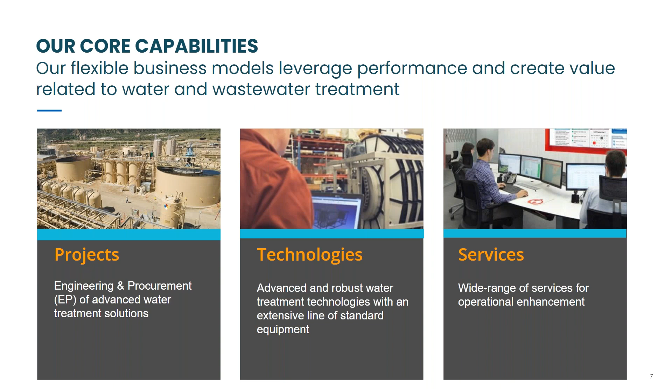Okay, so now I'd like to introduce our speakers for today's presentation. Mark Dyson is Vice President of Veolia Water Technologies, overseeing its global mobile water services fleet. He has more than 25 years experience in the mobile water treatment sector. During his career, Mark has both lived and worked within the UK, Germany, US, and Kenya, where he has managed the development of the water business for a number of major water treatment organizations. Mark holds a Bachelor's of Science in Engineering and Management from Brunel University and an MBA from the Open University.

Additionally, our second panelist today is Tim Clark. Tim is the Vice President of Technical and Execution for Veolia Water Technologies North America. He is a chemical engineer with over 30 years of water treatment experience in chemical treatment, process automation, membrane technologies, and implementation of operational improvements. He has been with Veolia for over 15 years and has a bachelor's in chemical engineering from the University of Tennessee. And now with that, I would like to turn it over to Mark to start our presentation.

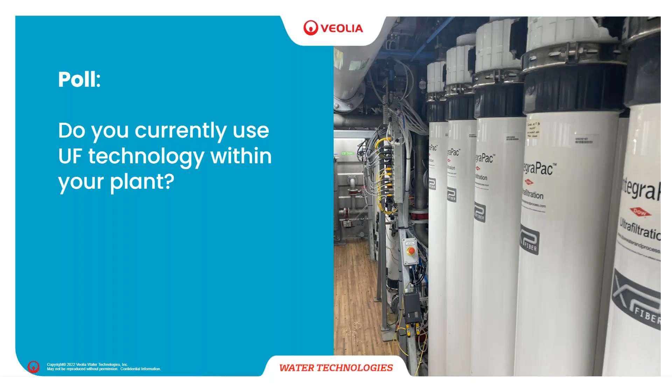So the first thing is, why ultrafiltration for industrial water? If you look at the overall market, UF is a growing technology that's now being used more and more commonly in industry over the last 20 years. If you look at the treatment applications where it's typically used, it's used for the treatment of groundwaters, wells, aquifers, where there can be metals within the water, surface waters, rivers, lakes, dams, streams - typical places where you could get suspended solids, also TOC. And more now, a lot of organizations, due to environmental and sustainability issues, are looking to recycle where possible secondary wastewater. So UF actually gives you the opportunity to be able to do that more now than previously. That's quite an important area we should be looking at.

If you look at the contaminants that are removed or reduced, UF is a physical membrane barrier. So it's very good at reducing turbidity, suspended solids, colloids - especially problematic colloids like silica - organics, TOC, and microbiological activity, to some extent bacteria, pathogens, and viruses. Metals like iron, manganese, and arsenic can also be removed. Overall, UF as a technology can either be used with or without chemicals - it simply depends on the process, and Tim will talk a little bit more about this for you later. But these are the places where you would typically find UF in industry and the types of contaminants you would be looking to remove or reduce for your water treatment plant.

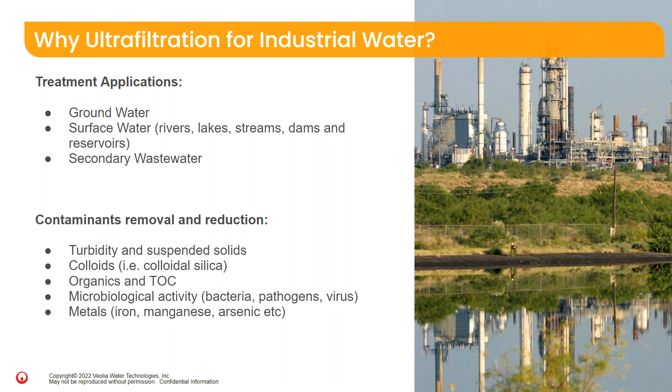So if you look at some of the benefits of UF, it's a continuous, reliable, and steady state operation for the production of treated water. It actually produces a very consistent quality of water during its operation, because it's a physical barrier. So unlike conventional clarification or filtration where you can get hiccups in the operation, UF does give you a very consistent both flow rate and quality of water. It has a very high efficiency - typically most recoveries are in excess of 90%. This does obviously depend on the feed water and the contaminants you're looking to remove, but typically it's very high compared to conventional treatments.

And it has a very small footprint, which is great where you want to do upgrades or retrofits, or at existing sites where you've got some issues and contaminants you want to remove, and space is at a premium - where you sometimes can't build something new within an existing facility.

And the other thing, because it's a membrane system, it's a pumped process, this enables you to ramp up by adjusting the flow rates and pressures of your pumps. So you can actually scale up and scale down the amount of water you want to produce, obviously within the limitations of the membranes.

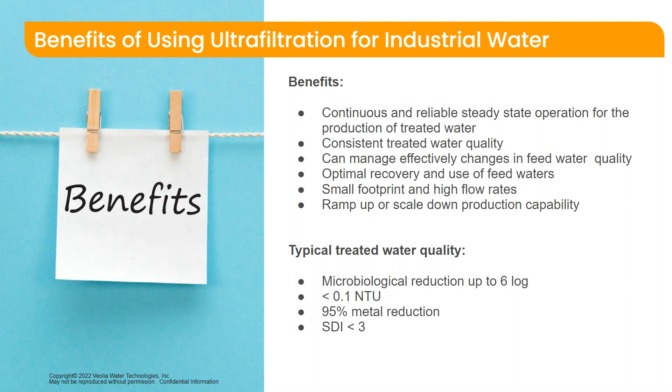So all of these points really would add up and give you a much more reliable operation of your permeate plant. So what I'd like to do now is step you through a 3D walkthrough of one of our trailers. I think what we're trying to do here is just to purely demonstrate to you the compactness and the uniqueness of what this mobile asset looks like, and the equipment scope, and basically how it's configured. So if you just give me a second, I'll pop up the video and we can take a look through.

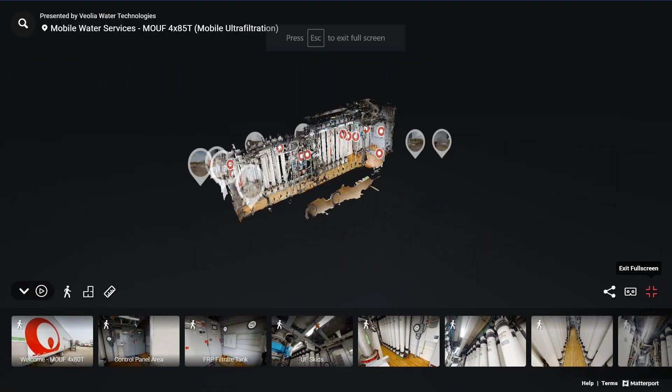So to start the video, as you can see, it's very simple. It's just an external trailer, and then we go through the unit and up through the steps and into the control room here.

So you can see within here is a complete control panel. There's an HMI, so everything for the operation of the plant is retained within this complete control system.

Then over here, this is a unique feature of our system: this is the filtrate tank. So all the water produced by the unit is fed into this tank, and this is a 2,800 gallon tank. From this tank, the water is normally sent with an external pumping system to your application. Typically this tank is supplied as a separate piece of equipment, but with our assets, it's all combined into one, giving you a distinct advantage of having the asset actually within the equipment.

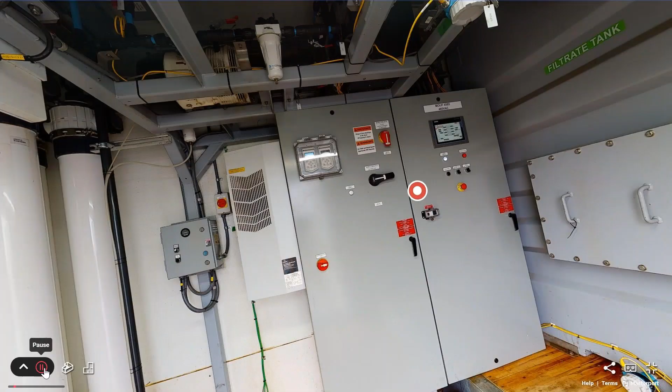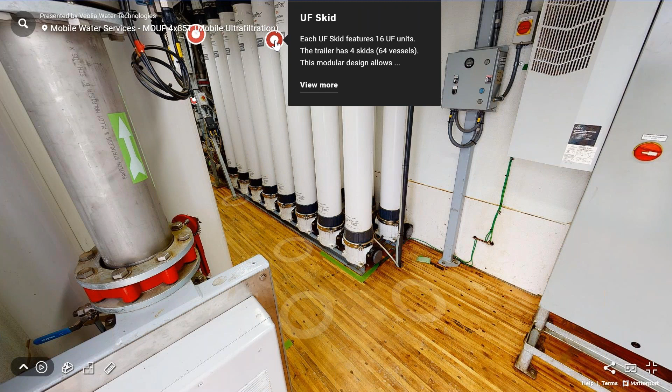Moving round, you can now start to see the infrastructure and the membranes. This gives you one rack of membranes. Within our system, we've actually got 4 racks, so there's 16 UF modules in each of these racks. The way the system operates, you can either run 1 rack at a time, 2, 3, or 4, which gives you quite a lot of versatility in terms of production output.

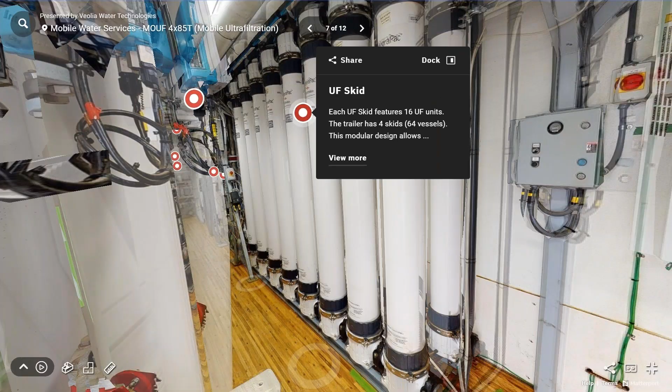If you're running the system below its maximum capacity, it also gives you a lot of versatility in terms of being able to switch equipment on, off, ramp it up, ramp it down according to your cleaning and CIP cycles and backwashes. So then just looking down the trailer, you can see here...

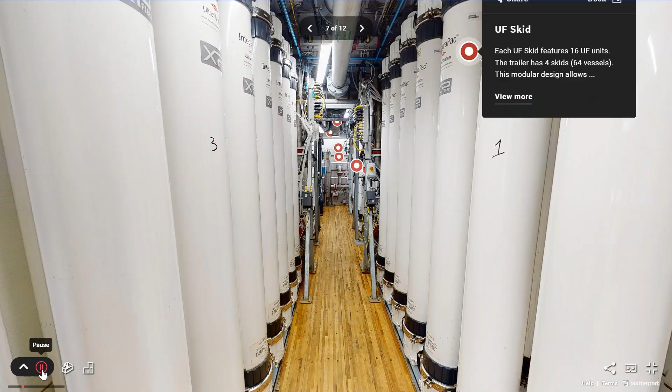It's quite extensive until you come to this middle section of where the UF trailer is inside. You can see everything's quite tightly packed in. Just over here, this is the control and valving system for these 2 racks of membranes on this side, and it's actually replicated on the other side.

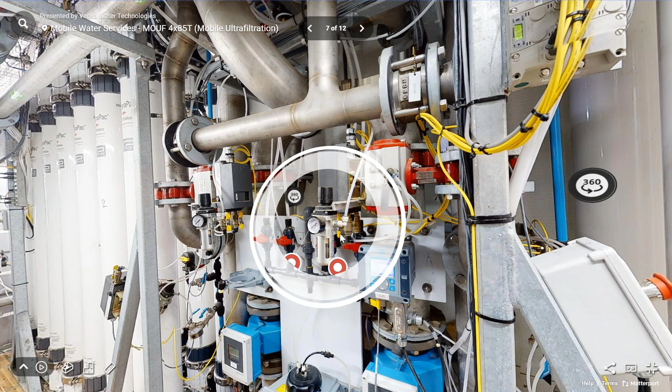So each system comes with its own online turbidity meter, so you've got complete visibility of what the treated water is at all times, so there's no surprises there. And you've got a specific flow valve which controls the flow in and out to each UF system, so everything's balanced, everything's monitored.

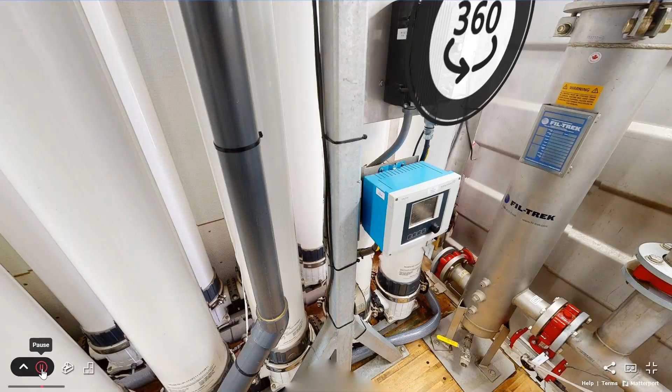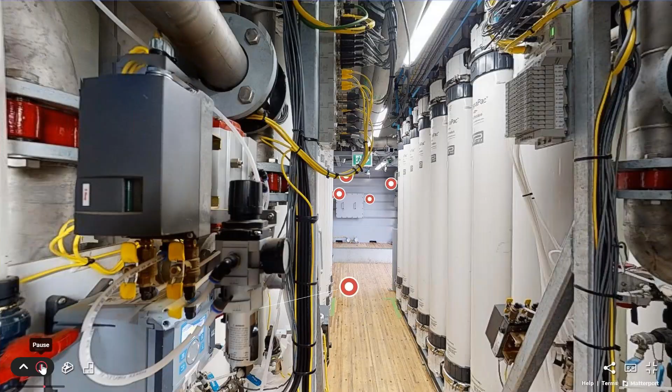So if you do have any problems or issues with the quality of the system, you can shut down different trains at different times, and you're not fully dependent on only one complete unit. And that's what it looks like at the back. So I'll go forward further, going back to the door again, and this is where we go a little bit outside.

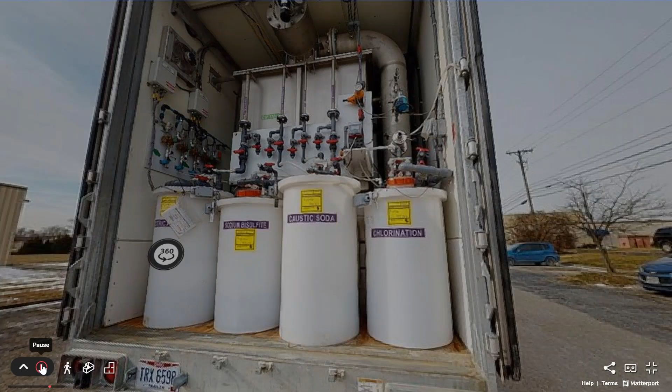So it's a little bit slow, but we get there. And this is important. This is the rear of the trailer. So at the back of the vessel here, this is your CIP tank. So if you have to do any in situ chemical cleaning of the membranes due to fouling, all of the control systems, all of the chemical systems are mounted here. And as you can see, you've got your various acid, alkaline, oxidants that you can put into these tanks, come up with the right sort of cocktail and formulation to clean in the event of any fouling of the membranes.

And you can shut down, as I mentioned, individual trains one by one to make sure that you can clean independently. And at the front of the unit here, you've got all of your electrical power and connections. So again, it's very easy from an external point of view to connect up to this equipment, get it operational. So it's very much plug and play, put the power to it, connect the feed water and the drain, put your chemicals in as necessary, but everything else is within the trailer itself.

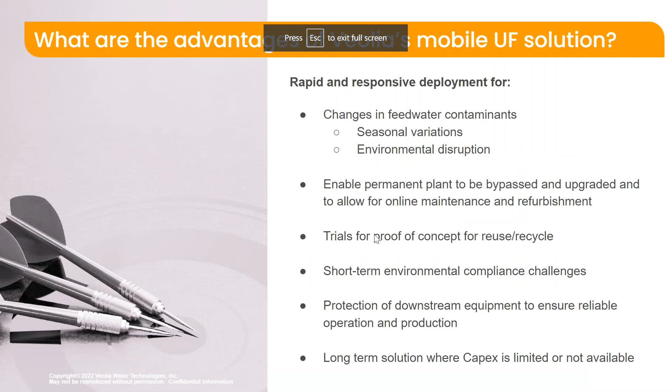So we thought it'd be useful there just to show you what the trailer looks like from inside and basically how the equipment is configured. So I'll go back to the presentation now. Skip that. Okay. So hopefully that was interesting. If you ever want to see a piece of equipment as well, we can deploy one so you can see it.

So what are the advantages of our system really, of the UFs? So the key advantages are that many of you might have experienced seasonal variations in feed water contaminants, especially if you're taking in water from rivers or any sort of surface waters. Contaminants can change due to heavy rain or dry seasons. So the good thing about the UF, it can be deployed very rapidly, and as you see, it's all contained within the same unit, so it's very quick to start up and put into operation.

So if you do have any of these environmental or weather-related disruption issues, we can mobilize a system very quickly to your site for short periods or longer periods of time, just to bridge that time period that you need to have your plant operational, where otherwise you could be facing some sort of shutdown or damage or effect on your plant. It can be used, and it has been used, and I'll show you a case study later. You can install the system if you have to do any maintenance on your clarification system or on your filtration system. So you could actually bypass these assets and carry out hot maintenance, so there is no downtime to your plant.

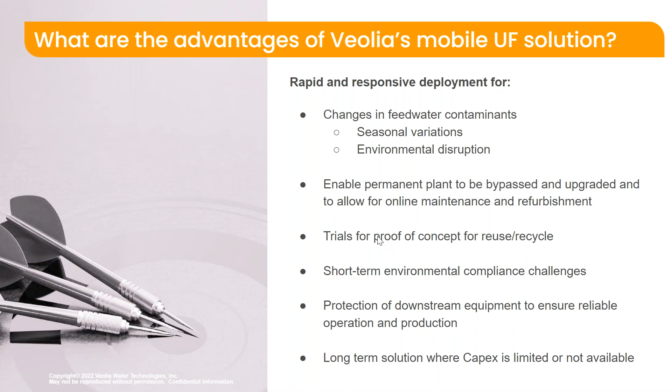Short-term environmental compliance challenges: from a production perspective, you may be producing different products at different times of the year that may have different contaminants in them, which may stretch or affect your discharge consent. So again, you could apply a UF here on a temporary basis to treat the wastewater to make sure you're fully compliant. And it can be used both for short term and for long term. So where CapEx is potentially an issue and you might be delaying an investment for 1 or 2 years, you could actually rent this for that time period, or potentially a longer time period. Why buy when potentially you could rent is a slogan there.

So some of the unique features of our UF, as I mentioned before, it's very compact with very high flow rates. The 4 skids are actually capable of making up to 350 GPM each, subject to the feed water. So they can either be operated 1, 2, 3, or 4. So you can actually take 350, 700, 1050, or up to 1400 GPM from the unit itself. So it's very, very flexible.

And when you do the CIP and backwash, because it's a very modular system, you only need to take off 1 rack at a time. So you don't experience, say, all or nothing or 50%. You'd only expect something like a 25% downturn in flow, while 1 unit CIPs or backwashes, then it's back online. So you are getting continuous production from the unit.

And it's a very simple, as I've mentioned, standalone plug and play solution. So everything pretty much comes on the trailer, which optimizes things like logistics and freight costs. So when you look at the process train, it's got the latest, highest efficiency membrane technology, we believe, on the market. Comes complete with pre-screening.

All UFs have to have pre-screens, taking out the lumps and the bumps from the feed water. The backwash tank and pump that we saw inside, and the membrane CIP system. And it's got a complete air scour system, because you don't always want to use chemicals to clean the membranes; if you can just do it with an air scour, that's more environmentally friendly.

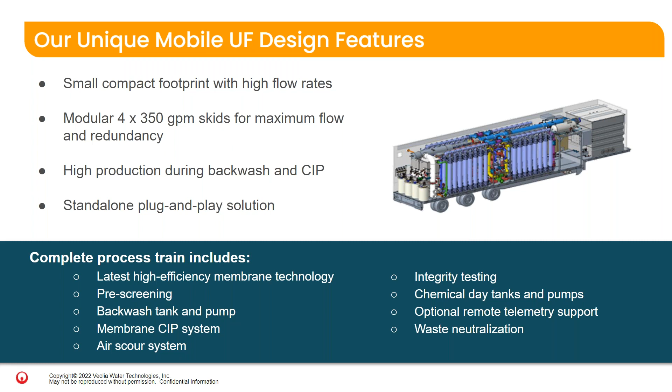The membranes have automatic integrity testing, so you want to test for leaks as well as measuring the turbidity on the outlet, complete with chemical day tanks, and you could have an option of remote telemetry support, which would give you the typical main parameters you'd be interested in, like flow, etc., and common alarms, which is very important, and the waste neutralization to make sure that any of the chemicals you're using on board the system are fully neutralized before you discharge to your wastewater.

So our approach is quite unique. We work with our customers how they want us to work with them. So we can offer very minimal operational activity with our clients, should they wish, or they can be involved more or less. It depends how they want to manage the deployment of this. We have 24/7 support to make sure all our assets are functioning correctly, giving you the right quality and quantity of treated water.

Our preference is always to use minimal or no chemicals with the operation of the system, but sometimes you have to use some. We adhere to all of the health and safety requirements, which obviously are critical with these pressurized systems and systems that are using chemicals from time to time. And we're there for as long as you need us. It's very much a pay-as-you-go service.

It's very open-ended. So if we come on site, if you have a need for a week or two and you want us to stay longer, then we're able to extend that and work with you. So you can always be sure that you've got someone who's providing you with treated water. And it's a complete service: logistics, spare parts, support, reactive and proactive maintenance, engineer support. As you can imagine, we're there each day to help you through the operation of this equipment.

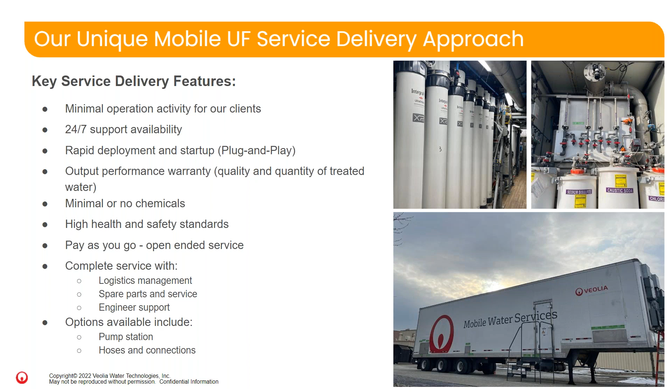There are some options available: additional pumping station, hoses and connections, and tanks and other accessories if you want them. And if you need them, we'd work with you to make sure we provide them all for you as well.

Great, thanks, Mark. That leads us to our second poll question that we will be launching on your screen shortly. Do you have any upcoming scheduled maintenance planned for your process water systems?

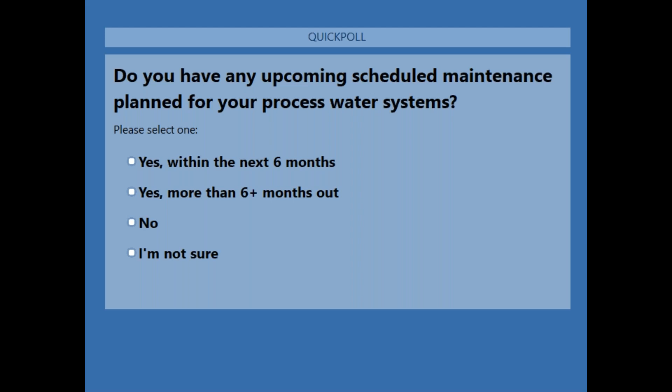Okay, looks like we've got the majority of people voting here, so I'm going to go ahead and close this poll and share the results. So it looks like a few here have some scheduled maintenance coming up that they're aware of, but the majority, about half, currently no. So with that, we will rejoin the presentation.

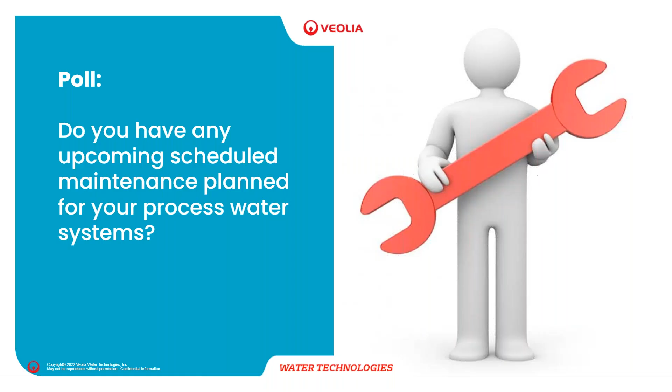Okay, thank you, Jill. We're moving on to the next section, which looks at the technology. So it's my pleasure to pass over to Tim. Over to you, Tim.

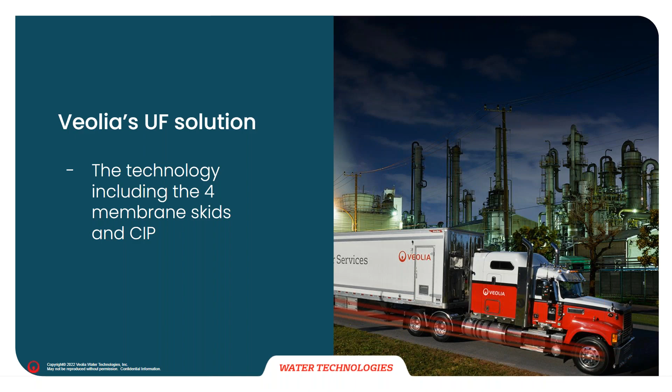Thank you, Mark. As Mark went over, this is a very unique and very versatile unit that we feel offers some great design advantages. And when we put as much thought as we did into offering a lot of the things that you see in this unit, the one thing we didn't want to neglect was what we picked. We had a lot of options for filtration. We wanted something that wasn't depth filtration. We wanted something that was lower pressure, so it was safer and required less operator involvement and less safety oversight.

So we went with UF because it meets those needs, but it also, as Mark said, removes a lot of things: the 6-log reduction in bacteria, the ability to remove colloids, silt, dirt, things like fats and proteins if you're in an industry that may put those out, sugars, amino acids, or even using chemistry to remove things such as metals. So we chose the UF membrane, and then we asked which UF membrane, because there are a lot of ways to look at it. And so we worked really hard to pick the right membrane. Let's move forward, Mark.

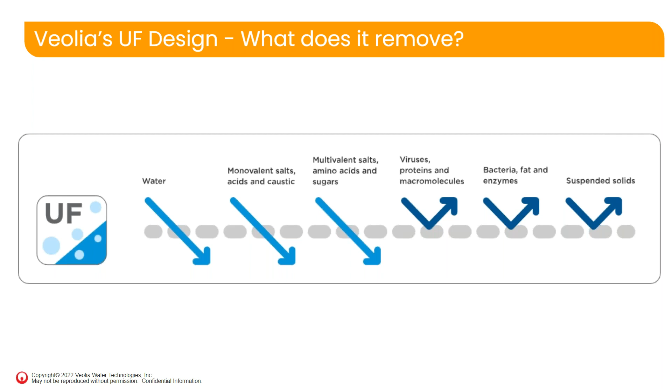So we picked a membrane that used fibers made out of PVDF. We did it because it has really good surface quality. It also is very temperature tolerant. It has a high chemical tolerance. So if there is a need to use chemistry ahead of it, the chemistry can't affect the membrane. It will also allow the membrane, if we need to chemically clean it, to be able to handle that. But it doesn't need it.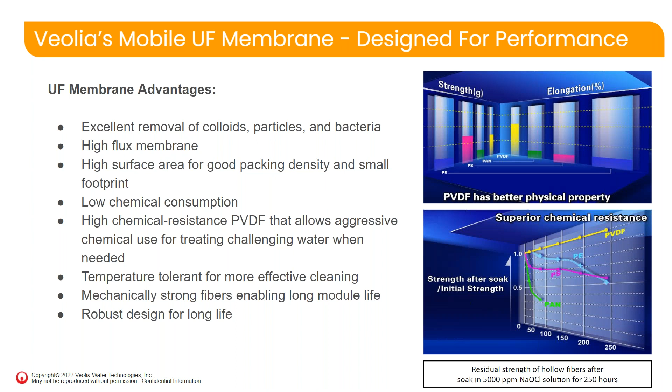We can use variable flux rates on this membrane from 24 to 82 GFD, so it allows us to get very high flows when needed, or take the membrane down when we need to meet whatever the individual plant's requirements are. If we go to the next slide, you'll see a little more on the design we picked. We decided to go from outside in, which means the filtrate water comes from the outside of the membrane, goes through the membrane surface into the inside. So clean water's on the inside of the membrane, dirty water's on the outside of the membrane.

So what that does is it significantly allows us to tolerate a much wider range of incoming water from a turbidity perspective. It allows us to get the most efficient use of that water, and it also uses a dead end design. So when it filters, 100% of the liquid that comes in actually leaves as filtered water for you to use on your plant.

Like I said, the PVDF chemistry allows for a very high chlorine tolerance, up to 2,000 when you're cleaning it, up to 200 if you're running normally. So if you have a stream that you need to be aggressive for bacterial control, it does that very well. It's a very high permeable fiber, and it uses a lot less energy. And we all know that parasitic demand is something we try to avoid.

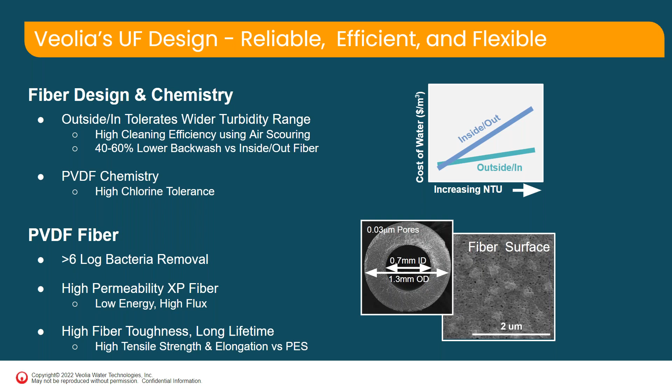The last thing on the outside in design, if we go forward, Mark, it also allows us to get more use out of the membrane. If you think about, if we went from the inside out, if you look at the fiber itself, if we're putting contaminants inside, we're using much less of the surface area as compared to the outside. So what we do is we double the filtration surface area so we can hold more contaminants in between backwash. We also don't trap them in a smaller space. So when we go into backwash, it's easier to remove them.

When you add to the fact that with a dead end, outside in design, we can add low pressure air to the backwash. When we go to remove these contaminants, we now get that scrubbing effect that the air has, the small bubble, and the lower the transmembrane pressures stay, allowing us to backwash less frequently and deliver a higher quality of water. The dead end design also makes it easy for the system to monitor if there is a broken fiber, and allows us to repair it much more easily. So it's just a little bit of why we did it.

We feel like the membrane itself is the top end technology available for use in UF, and we think it offers this unit with the other design features to be something that is easy for people to operate without having to put a tremendous amount of involvement.

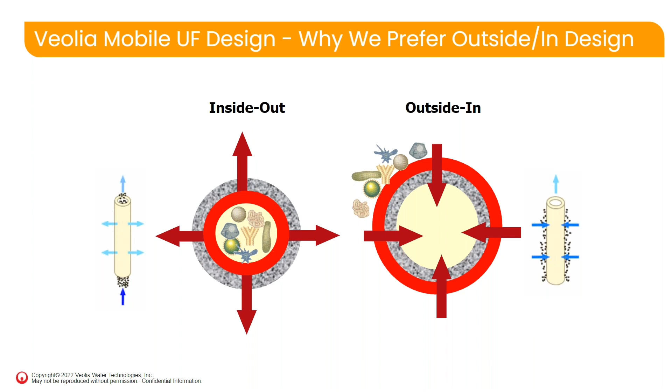The next slide is just a little bit about why didn't we pick something else, and compares it to microfiltration. A lot of people like that. It's a great technology, but it is more of a depth filtration technology. The size of the pores and the way the membranes are designed allows debris to penetrate into the membrane pores like a depth filter, which means it can't be cleaned as well. So you have to be more aggressive either with chemistry or other things to clean the membrane.

You backwash it a lot more frequently. Because of that, we decided we wanted to move away from that technology, especially when you add that it doesn't do as good a job removing things like microorganisms, which are a big issue if you're running downstream membrane processes like reverse osmosis or EDI.

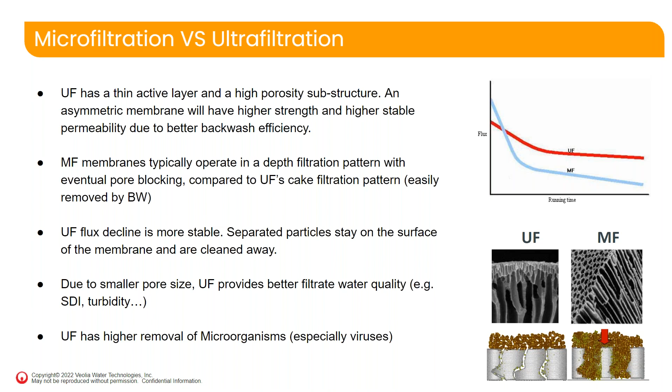And then the last slide that we have on the technology is a video that shows how this technology works.

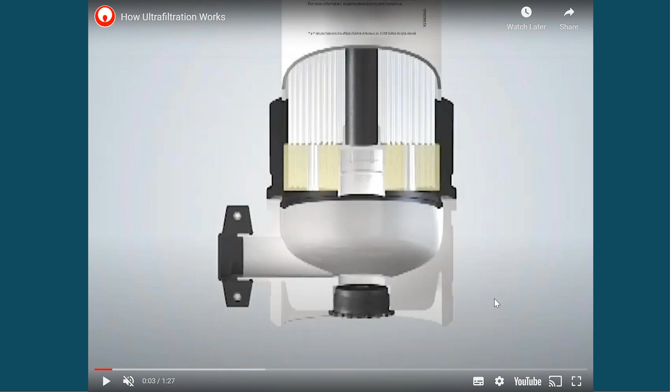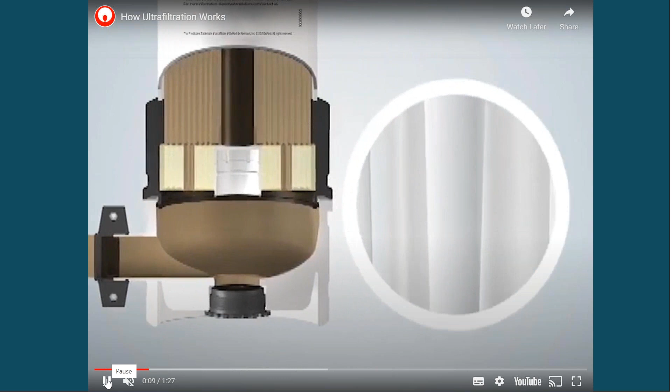As you can see here, the water that needs to be filtered comes in through the bottom of the membrane and flows along the outside of the fibers. The water is then pressed through the fiber, with the debris staying on the outside and the clean water going to the interior of the fiber as it moves up the membrane.

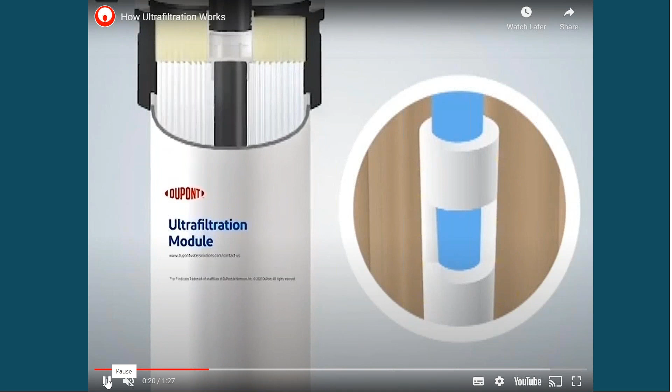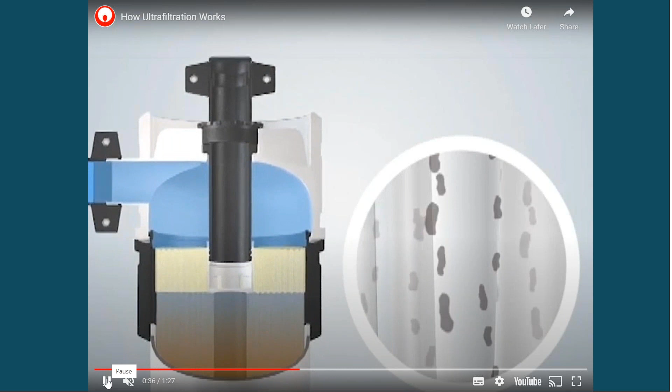When it gets to the top, the debris is left behind and clean filtrate exits the membrane to be used. Then when the unit detects a need, either on time or on pressure, for a backwash, we reverse that flow and bring water through the inside of the fibers, pressing it to the outside to release the debris, and the filtered water leaves and takes that out.

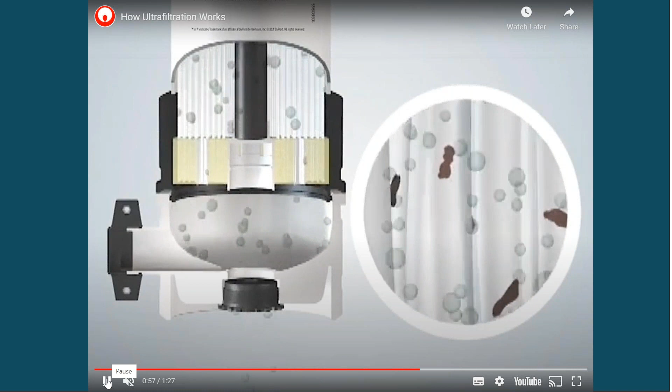Then we inject air into the membrane to scour it with low pressure air, which further helps remove any debris not dislodged by the inside-out backwash. The debris is loosened, and we then do a rinse with treated water and return the membrane back to service the way it was before the cleaning.

It kind of backs up what we said. It's a very good process.

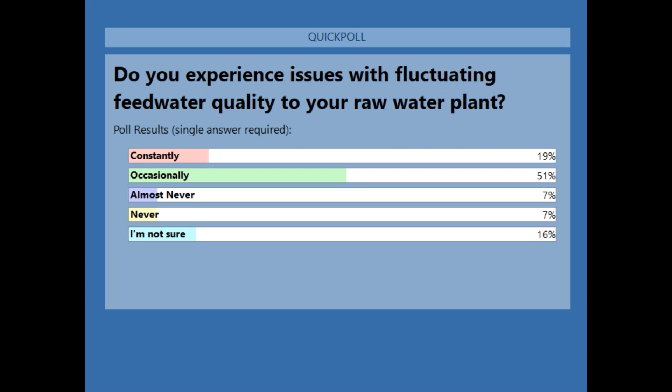It looks like we've got the majority of our results in, so I'm going to close this poll and share the results. It looks like pretty much the majority, either constantly or occasionally, are having issues with their feed water quality or seasonal fluctuations. With that, I'm going to turn it back to Mark to talk about how we can solve some of those issues.

So here are some of our North American case studies. I'll just talk through three that we've selected, which are specifically relevant for this presentation. This first one was an oil refinery in Canada.

They had an emergency situation where they were planning to shut down their clarifier. It was coming up for maintenance and was just limping along, and then suddenly there was a failure with it. So from something that was going to be planned maintenance, this really turned into quite an urgent emergency. The source of water the customer was treating was river water, and this was actually feeding their demin system.

So for those of you working in metric, we actually supplied a system up to 545 cubic meters per hour, or up to 2,400 GPM. The cartoon at the bottom basically shows the assets we supplied as our solution.

We actually had two of our ultrafiltration trailers working in parallel, feeding two storage tanks and two pump skids. So we could receive the pressurized feed from the customer, treat the water, put it into the storage tank, and then pump it forward to their demin system. The benefits for the customer were quite simple, really.

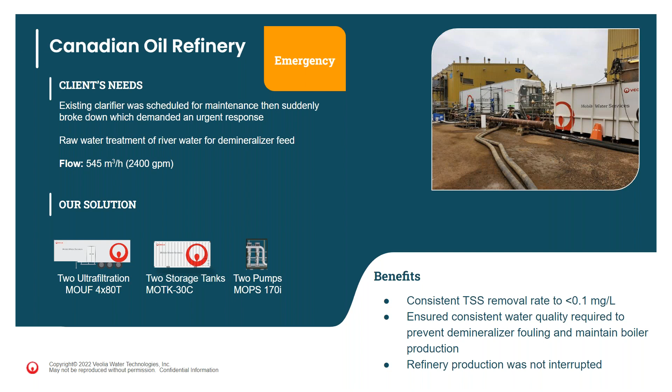The second case study is in Canada, where we're working with a client on a multi-year solution. This pulp and paper plant was experiencing seasonal fluctuations in the quality of their river water. In this case it was mainly organics rather than solids, and they were looking for a pre-treatment system for their demin plant, because the organics were fouling the resins and disrupting the boiler chemistry. One key criteria was that this was an existing, very mature site with limited space, so they were pleased to see we could offer a high capacity, high flow rate unit that met their requirements.

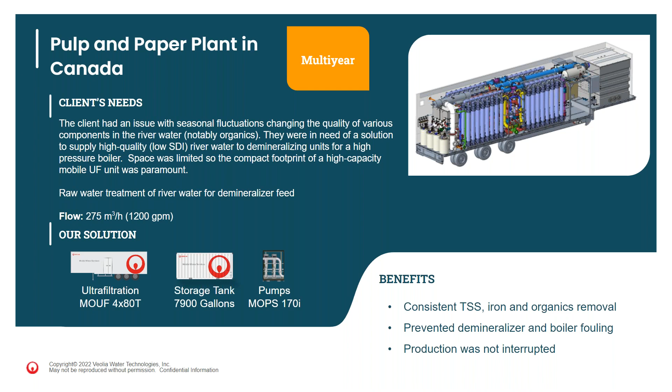The flow rate here was 275 cubic meters per hour, 1200 GPM. The diagram shows one of our units feeding a storage tank and then pumping onto their water treatment plant. The benefits for the customer were consistent water quality and removal of TSS, iron and organics, preventing further fouling or inconsistent operation of the demin plant and boiler, and their production wasn't interrupted. Another key benefit was they didn't have to go for CapEx before they could get this system - it was just a question of putting an agreement in place with us, which we do very quickly, so they could have the asset within a short space of time. That really helped them with this application.

A chemical plant within the United States - again, a typical application where the customer had problems with an older clarifier, causing inconsistent water quality based on fluctuations in the feed water. After the clarifier and filtration, they were feeding into an RO, so they had high costs maintaining and cleaning the RO membranes, and the reliability of their water treatment plant to meet production needs was obviously at risk.

As the solution, at 1200 GPM, we provided one UF unit, a storage tank, and a pumping system. This was under a more pre-planned agreement with the customer, since they only experienced this problem intermittently, typically in certain seasons with bad quality water. So we were able to prepare everything in advance, organize it for the client, be on site, and then leave once it was finished.

Again, TSS and organics were important - we pre-treated for the RO so the SDI was less than 3, which is really good, and also supplied very low TSS water for their cooling tower, since this system was supplying both the cooling tower and the reverse osmosis.

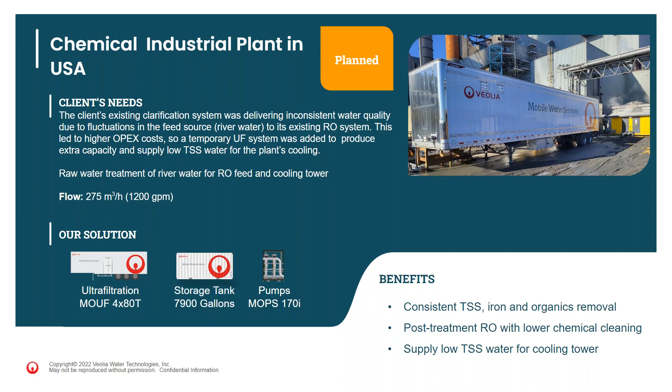Hopefully that puts a bit of reality into some of the theory and stimulates some thoughts and ideas, in case anyone here is having problems similar to those. Of course, everyone's site is unique, so that's where we work with our customers.

So moving on to the next section, we want to talk about what we will deliver and what we would take care of working with you. It's a simple slide - what do we deliver as a service provider, and how do we work with you to deliver a reliable solution? Typically we would manage all of the process support and supply our expertise from a process and equipment perspective, and we would manage your full logistics and transportation.

Colleagues like Tim on the call would look very carefully at the membrane, apply their expertise and knowledge to how they can not only apply the membrane, but also how we can operate it in a very optimized way for you. We manage all the proactive and reactive maintenance and spares with our technicians, any chemicals, and we supply the technicians to start up, commission, and help you train your operators if they're going to do the day-to-day readings. So we really do as much here for you as you want, and we're very flexible in how we mix and match that with your site resources.

So really what we ask you to manage is the feed water, the infrastructure, where we would put the equipment, the security around the assets when they're on site, and to define for us the treated water requirements you're looking for, to help us make sure our equipment can deliver that to you reliably - the power, the wastewater, and any site characteristics, specifically related to health and safety, various inductions and behavior on site.

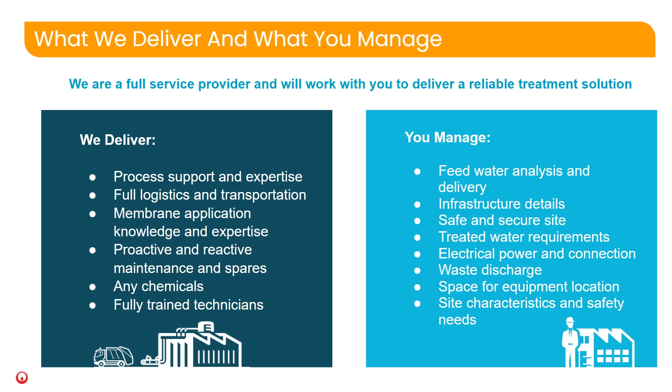So the final section I've got before a brief summary is: when is it an advantage to rent versus buy? That's always a choice. We're faced more and more with this in our private lives, but it's now certainly a big thing in industry too - should you buy or should you rent?

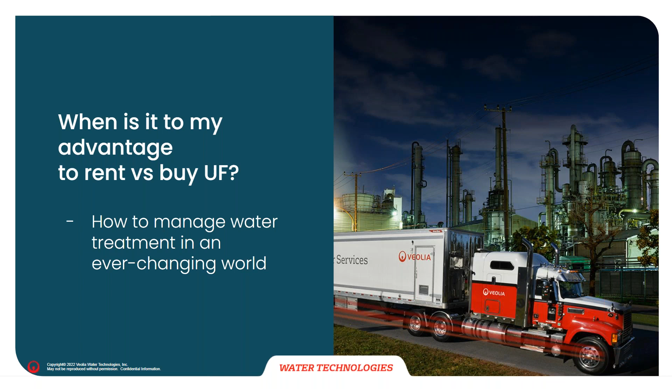So we wanted to make sure that you've always got a choice there, to buy or to rent. If you'd like to rent, you can obviously work with us at Mobile Water Services. But if you're looking to procure something more on a permanent basis, our other Veolia Water Technology colleagues could support you with that application as well.

So looking at some of the bullet points on why you would rent against buying - certainly for short-term or intermittent needs, there's a big advantage to rent, because the time periods we can be on site for you can vary from year to year. So an investment is probably not the way to go, because you could have time periods where the equipment's just redundant. You really pay as you go, and call us when you need us - short-term and intermittent needs may be the way to go.

If you've got challenging waters you want to treat, partner with an organization like Veolia, who can deliver the expertise and a reliable system that's going to operate uninterrupted, with all the support services I've mentioned before. That can be a good way to go, because it gives you that peace of mind that you're working with a reliable company, that you're always going to have the quality and quantity of treated water available to meet your production needs - because at the end of the day, that's the most important thing: that you've got treated water and maintain 100% of your production in your facility.

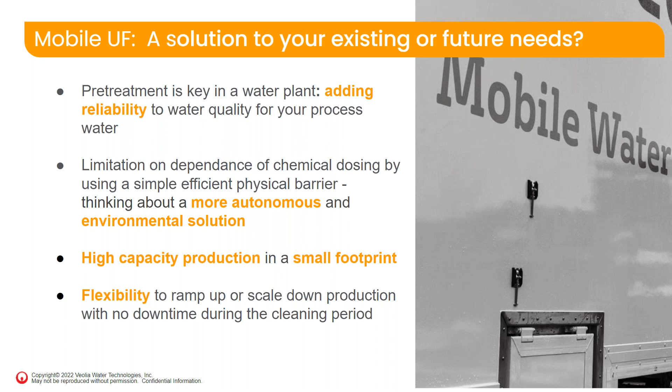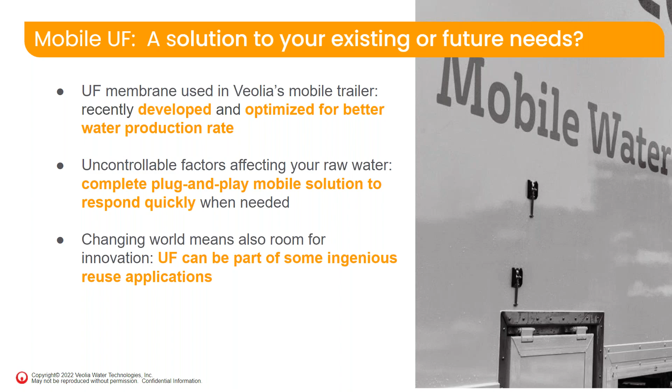So that's the end of my presentation and Tim's presentation. We'd both like to thank you very much. I'm going to move on to the next slide, and I think Jill will take it on from there.